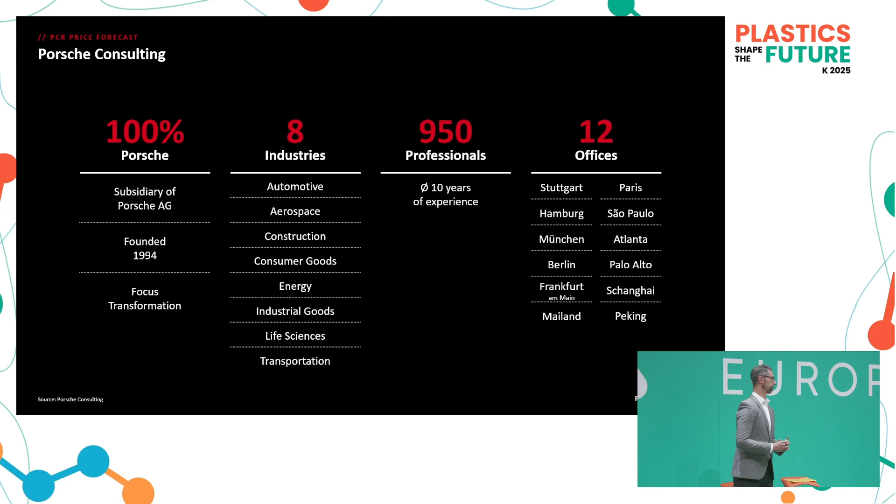A few words on Porsche Consulting. Basically, we are a 100% subsidiary of Porsche, founded when Porsche was close to bankruptcy, and that was the reason why Porsche Consulting was founded. If you read the news carefully, you might see some similarities to nowadays, but we won't discuss that right now. Basically, we have about 1,000 people, with an average business experience of 10 years.

So what is our picture on the circular economy right now? Currently, we have the narrative that a company that is not taking circular economy seriously won't be successful in the 2030s. There are several reasons why that is, and we will explain it later on. But the major task for today is to give you what we think are the 3 key points for the automotive industry to be successful.

The first point is, of course, to secure the supply of post-consumer recyclates, but also secure the supply and access towards waste to do that.

The second point is, of course, to promote new industries. We all know that the closed loop is not an existing industry right now, so there needs to be a lot of investment done to get this facilitated and scaled up.

And the last point, which is very critical, is to have a clear understanding of what full car exploitation means. So what is exactly the value of a car if you've taken it back and try to do something with it, whether it's a repair, a refurbishment, remanufacturing, or recycling.

So that is the entire picture, and as you can see, it's developed around an ecosystem, and at the core we discuss a virtual hub. It's not necessarily a physical hub, but we're trying to create the best out of the R strategies a company can actually do.

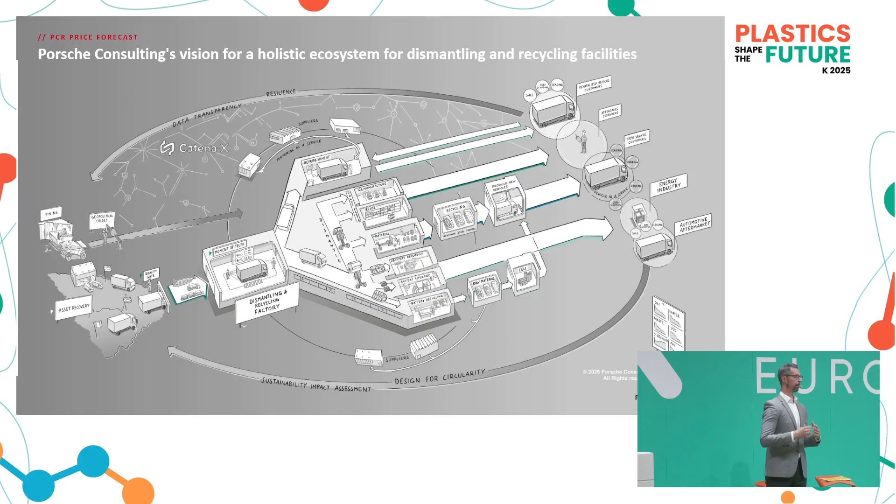So, speaking about that, we face some changes within the regulation and within the plastic industry. The major point you can see here is basically a very nice and beautiful correlation between virgin plastics and secondary plastics, and of course the correlation towards crude oils and naphtha. You can see that pretty well, there is a strong correlation towards the prices so far.

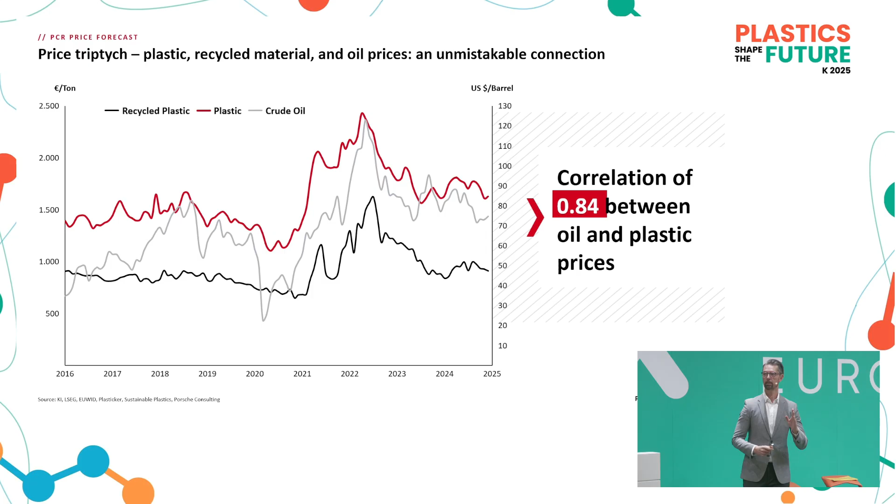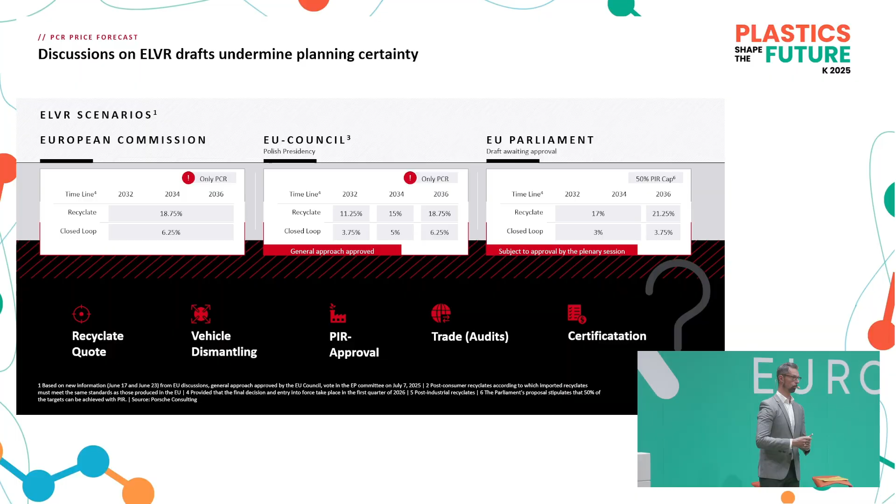That has been the old thing. What we see now is, of course, that we have some discussions going on about the ELVR, speaking about what will be the quotas, what is required in the future. We see that there are several versions out there, and it will be some quota somehow, where we will decide what the entire challenge will be in the next days, and hopefully we'll have the guidance towards the entire strategy.

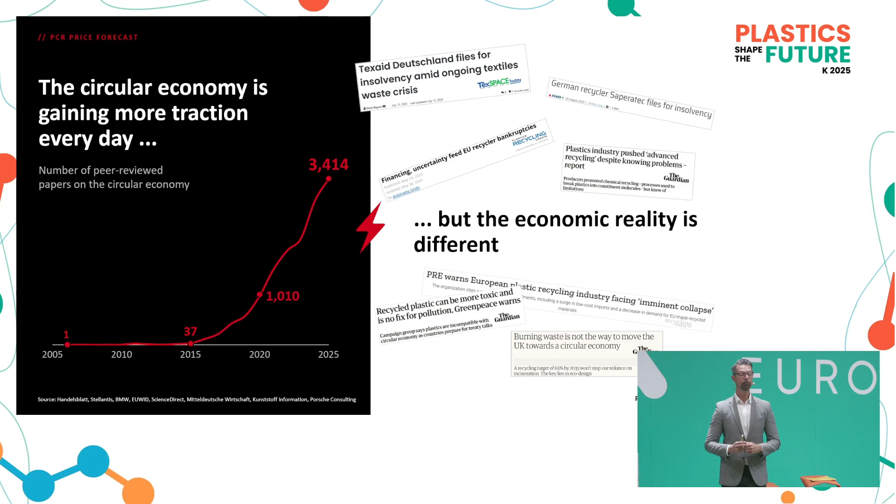But we also see that we have several indicators that many companies are interested in circular economy, but we also see on the right-hand side that there are some bankruptcies of recycling companies that are influencing the supply tremendously.

So what we were trying to do there was, with Tech Part, as well as the KI Group and the Technical University of Munich, to evaluate a mechanism on how to predict the post-consumer recyclate prices in the future, even though they're currently in a strong correlation with the virgin prices.

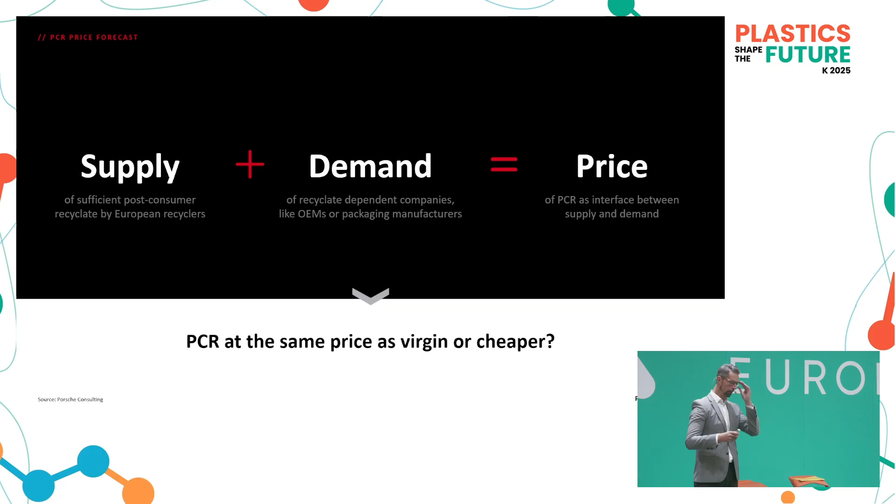But the point is, if you take it quite simple, it's just about the supply, it's about the demand, and that will equal the price. Pretty simple. But it's not that simple, so you need to look at it quite closely. What is the reason for what we are facing?

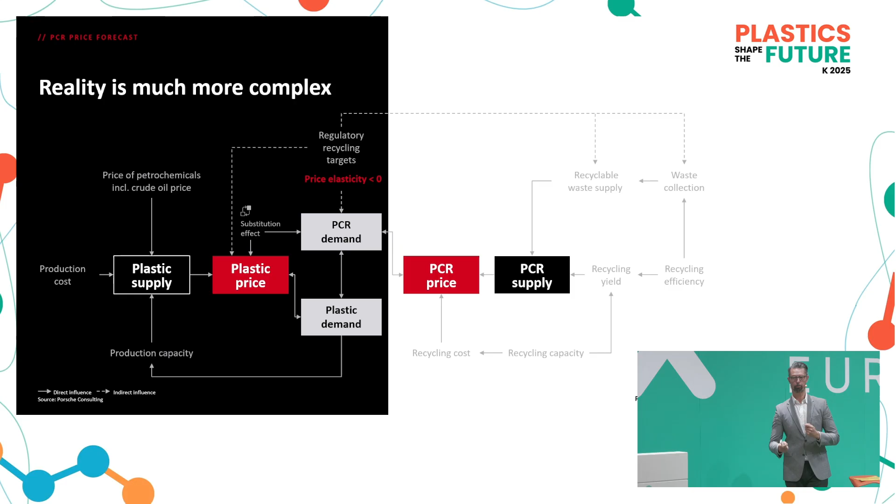The tiny point in this slide, not big and bold, is the term of price elasticity. So having those regulations up and running, there's a required quota of post-consumer recyclates in a car, and that will lower the elasticity lower than zero. That means we don't have anymore that price and demand correlation. Basically, some OEMs need to have those quotas fulfilled to bring their products to the market.

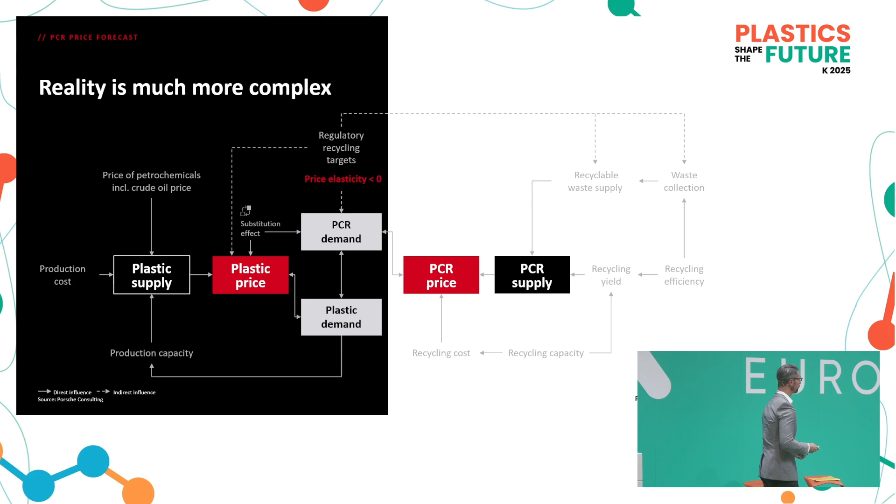And that has a tremendous influence on the entire price building. What we have done there was basically, in 3 scenarios, checking what the entire assumption is, what the supply is, as well as what the demand is, and trying to forecast in 3 different scenarios what can be an outcome.

For the 5 most typical plastics where we had very strong and valid data present, the major point is that PET as a vast commodity is probably not affected that much by the price increase. But we do have other components and recyclates that are heavily affected by the entire ELV regulation in regards to the demand.

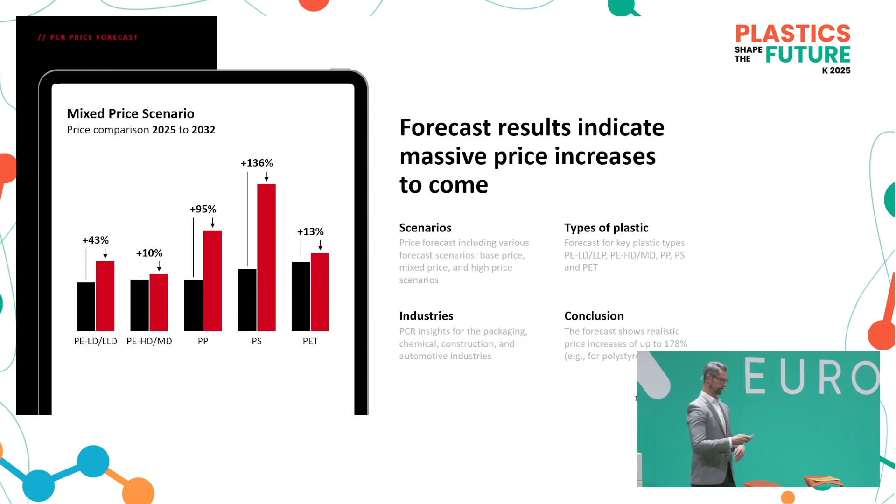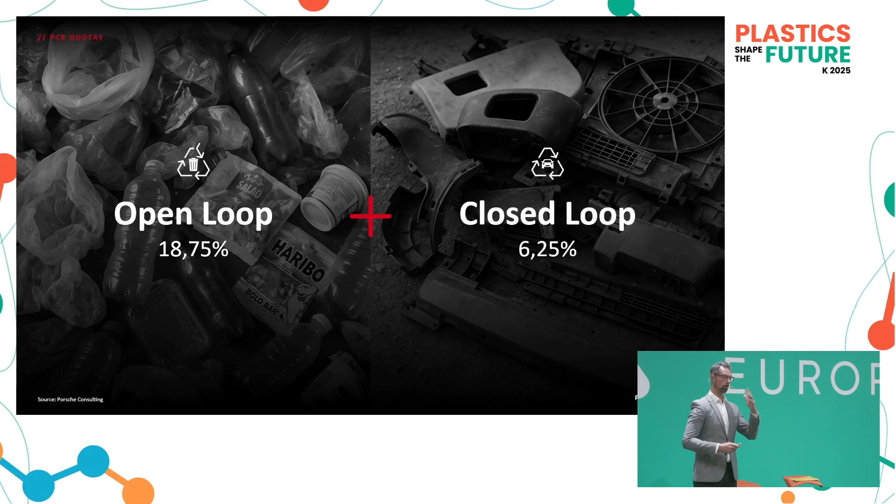As well as the supply. So what are basically the levers? We do have, of course, 2 different requirements. One hand is the closed loop, and the other one is the open loop.

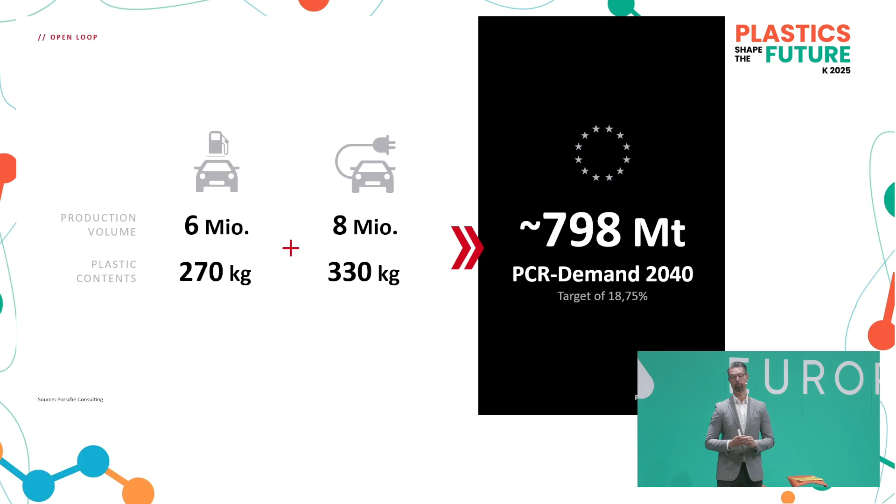Speaking about the open loop, the major task here is what many companies don't know - that we're looking at a very strong demand in 2040 of recyclates coming from an open loop in the entire European Union. We're speaking about almost 800 million tons applicable in 2040. That is a vast amount of plastics or plastic recyclates we are trying to get into the cars. That is a high amount, and every company can now decide how they deal with it.

They can, on the one hand, say okay, we don't safeguard anything and we'll leave it open to the market, which would be the lower right part, or they probably go to the upper left, saying okay, we're trying to safeguard as much as possible and get everything done. In between that, there is a sweet spot every company has to define towards purchasing laws and orders, trying to get those tasks really done in cooperation with partnerships or other companies, and sourcing it directly.

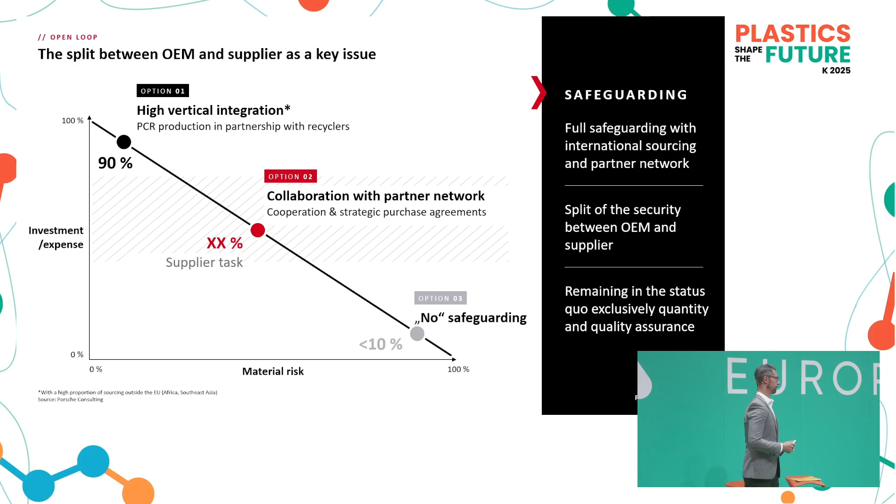The other point then is, of course, the closed loop, which is a more critical one because that is currently not applicable in a vast and scaled majority. So we have 6 main levers.

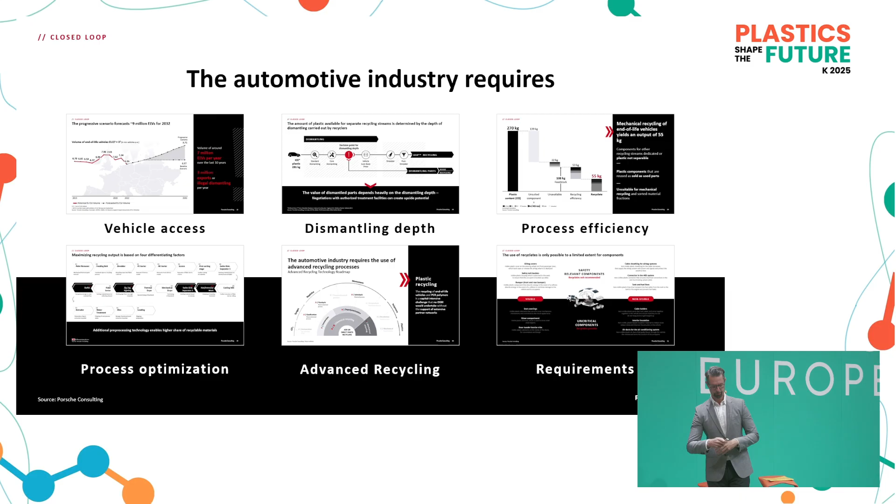The first point is, once again in the closed loop, how do we proceed with access to the vehicles? Currently we don't see enough volume in the European Union unless the ELVR is implemented and companies are working towards this, as well as the government. That is then an option which can increase the path towards more end-of-life vehicles in Europe.

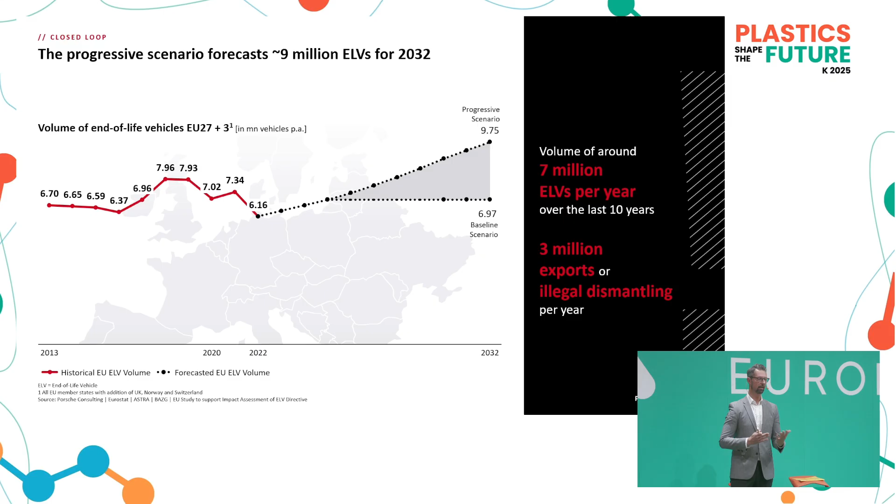The entire market won't grow in Europe. The growth rate for the next 10 years is about 1%, which is almost nothing. So there won't be any more cars coming to the market. We really need to work heavily on how we get access to the existing cars, to the fleet on the street, and get them back.

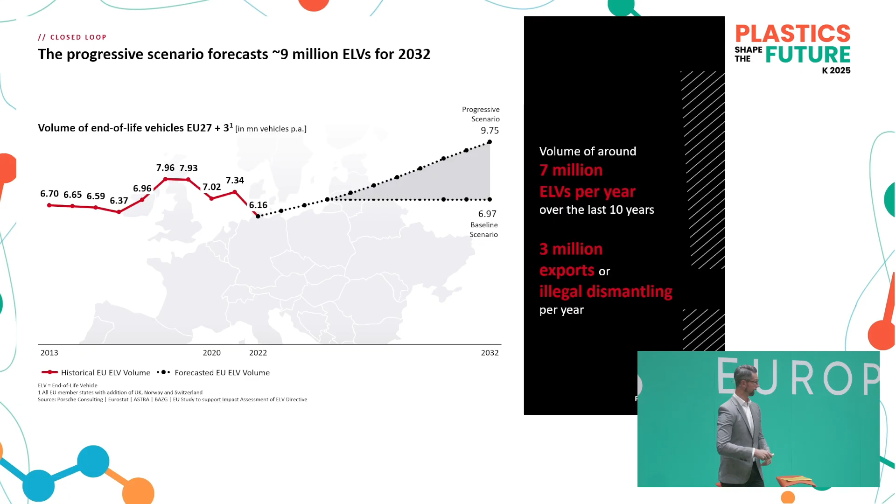Then the other point is, of course, if we have the cars in our hand, we have a very critical point there, which is the control point of how we dismantle the cars. If any company doesn't have access to that critical point of how those cars are being dismantled, they won't have access to the specific parts that are quite crucial to increase the share of closed-loop materials.

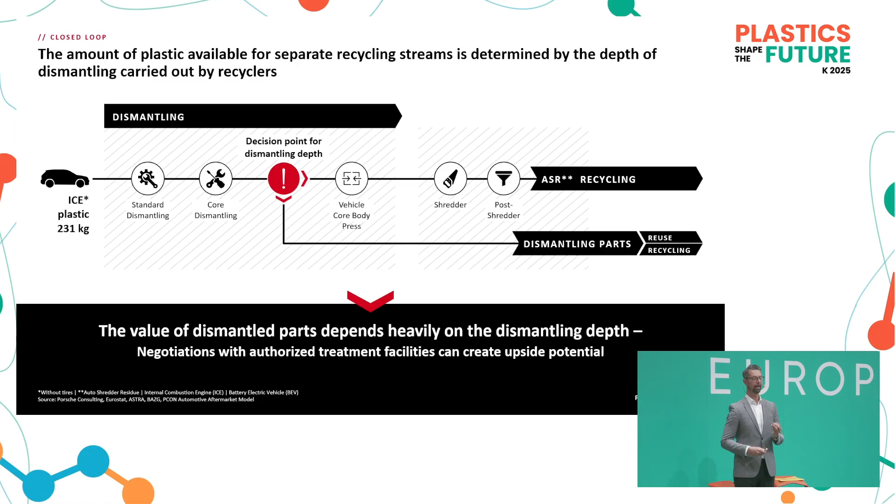And they will probably lose the entire effect. So that is a very critical point every company has to be aware of and be proactive so that they have access to those critical points.

The third point then is, of course, to decide what parts are going to be dismantled towards their value. And that is then the critical point. If you can see here the different levels, the minimum is the current ELV, the advanced is the upcoming ELVR, and the maximum is the amount of cars we highly encourage companies to dismantle because they have a value whether you recycle them or not.

The value, especially on the reuse parts market, is even more and higher than the recycled value. So you need to be quite keen on what is the value of those parts, because not every part will end up in recycling. If we talk about circular economy, it's even more effective to get them into reuse or remanufacturing.

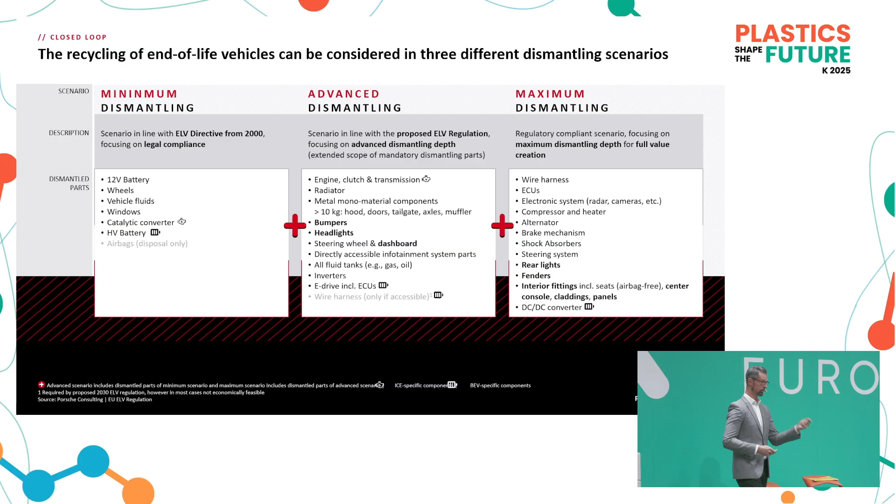So speaking about that, you need to be aware that an average ICE car consists of 270 kilograms of plastics. And we have a cascade to the efficiency, which is currently obvious. Within the first bucket, you see 139 kilos, which are currently not accessible for recycling yet, because they're basically too complicated, with too many ingredients.

Then we have 22 kilos, which are tiny parts embedded in the engine and gearbox - too small to really get access to. And then you will end up with a feedstock of 108 kilos of plastic, which you can then run through the recycling. And out of these kilos, you will get about 55 kilos at the current efficiency within the recycling industry.

So we have lots of losses within the entire process, speaking about mechanical recycling, and we need to be aware of it and work pretty hard to get towards the 108 at least for mechanical recycling, and we need to talk about advanced recycling to foster the 139 kilos within the second column.

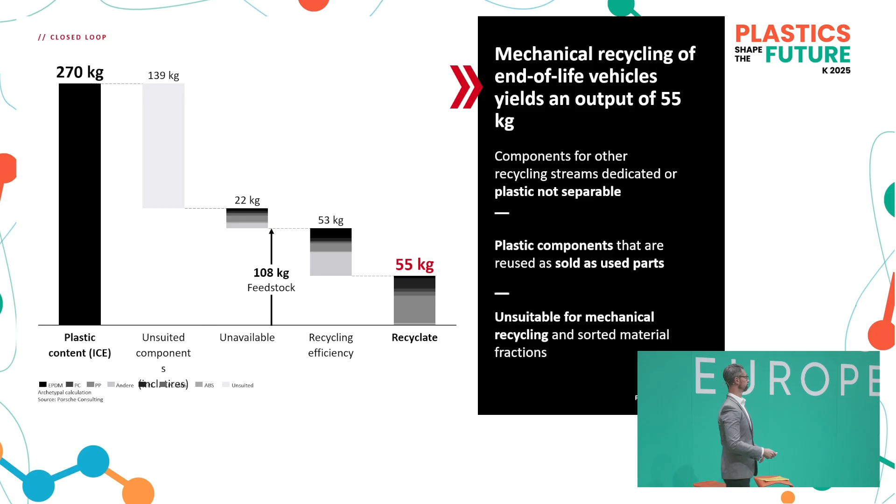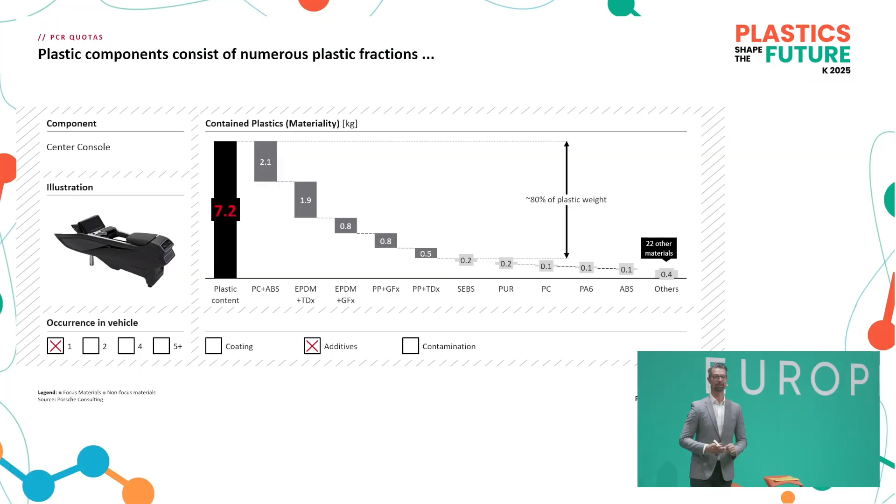The point there, how we analyze this, is with a deep dive based on the different materials. You can see here for the current panel, the center console, it consists of 7.2 kilograms of plastic, and we have a drill down on what is embedded in such a component. You see, it's quite difficult. Lots of materials are in it, and you need to be aware of the complexity, which I guess is quite obvious for all of you.

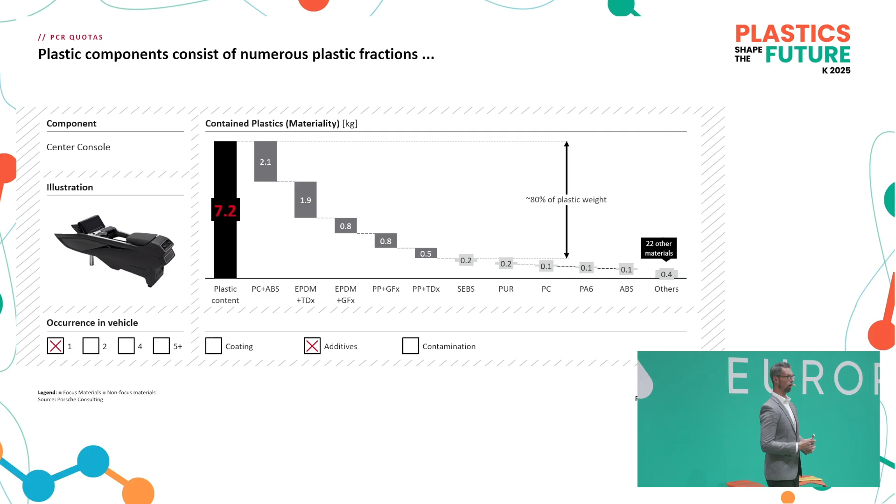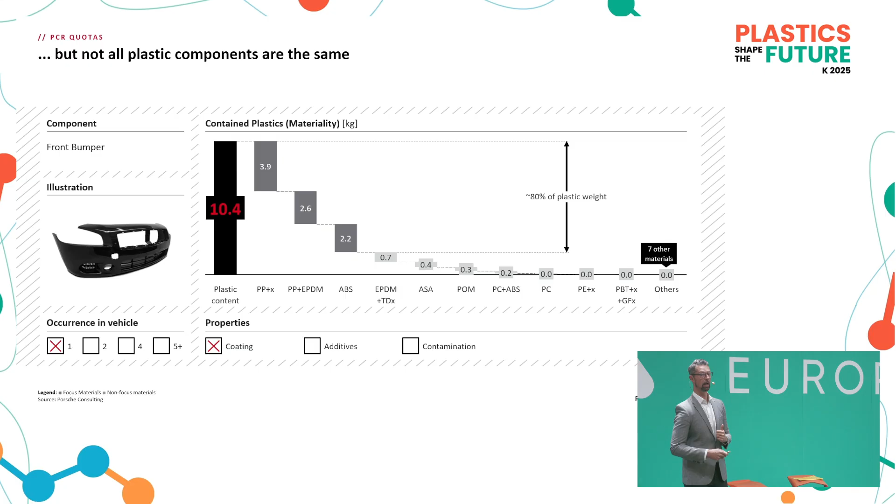The other part which many companies elaborate on is the bumper, for instance, which is the part many try to have a closed loop on, but this is also not trivial, and you need to be quite aware of it. First of all, it's a quite good part, a golden part in terms of the amount of weight. You get 10.4 kilos, but still you have huge components in there, basically the PP or ABS, and then you have to try to be aware of the other components.

The major point then for mechanical recycling as well is to try to increase the entire efficiency. If you go through it, you need to foster it with further technologies to even increase the entire efficiency. Basically, you need to have quite good washing. Of course, hot washing is quite crucial there. Then, of course, the swim sink should be embedded as well as the zigzag, to increase the entire share of proper material.

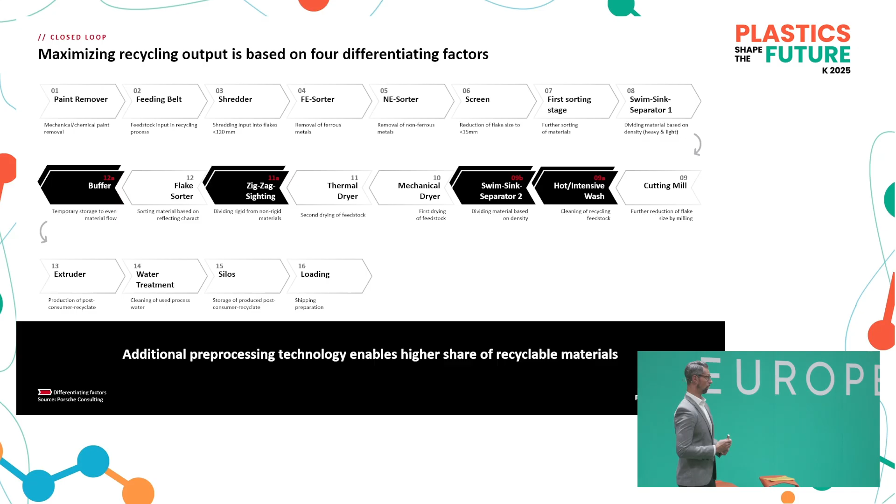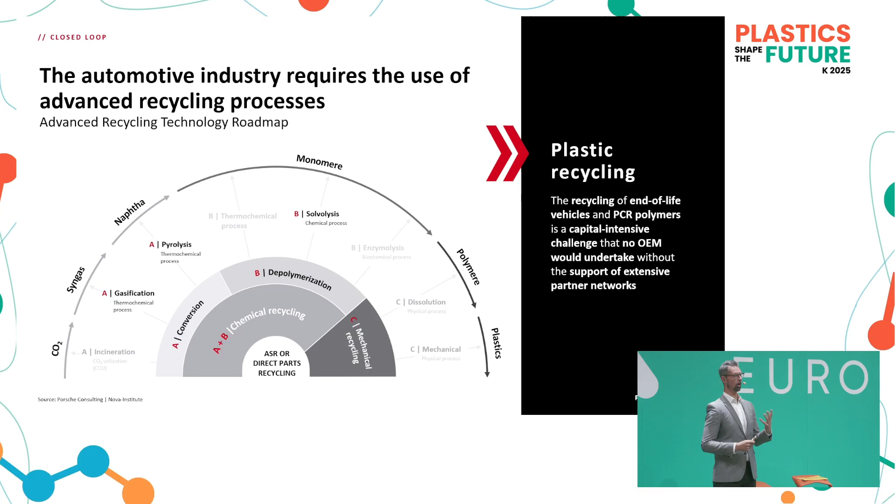But getting away from mechanical recycling, you need to also encourage advanced recycling. There are three major technologies: solvolysis, pyrolysis, as well as gasification. I think gasification was displayed two sessions beforehand with the example that BASF presented. But there are others, and they are scalable and present. The other ones are technically there, but not yet at a scale so that we can really foster it and use it as a technology for such a component.

So speaking about all the recycling, that is one hand side, but we also need to speak about the quality on the other side. Dividing a car into two axles, basically you have the one axle which is visible and non-visible, and you have an axle about the parts that rely on security, and the ones that are uncritical. If we would like to optimize the post-consumer recyclate quota in our cars, we need to discuss once again which level of quality for the client is acceptable and which one is, let's say, a heritage figure we've been using for decades, but with no further customer benefit.

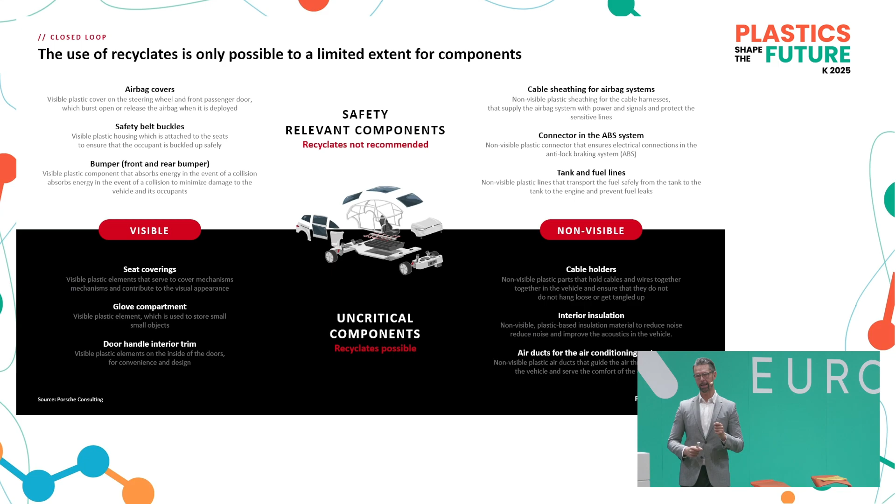If we are able to touch that, we are able to increase the PCR share tremendously within our cars. If we don't touch it, we need very high technologies to remain or maintain the current quality, and we will lose a lot of potential to even increase the entire share.

So if we would like to increase the share, there's a simple algorithm most of you probably have embedded in your companies. It's basically an 8-step approach on how to go through each part, trying to start from the components, from the materials, and then really see what the entire potential is for those parts, and have an index up and running so the entire car is measurable and we have a clear indication of what the entire car is capable of.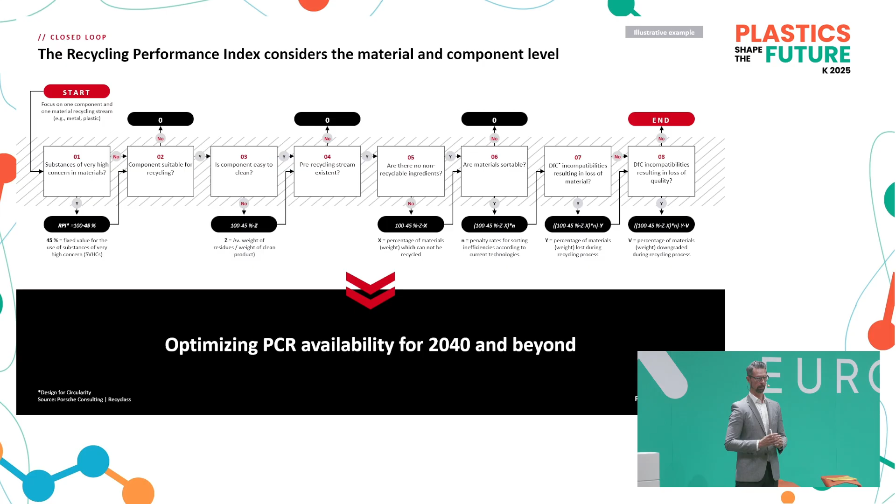So summarizing it once again: first of all, we really need to have access to the raw materials. In that case, I'm speaking about end-of-life vehicles as well as waste from the municipal system. Secondly, we really need to foster and encourage the closed-loop economy, because this is currently not present enough and not scaled yet, and we need to foster this entire economy in order to reach more out of the entire system.

The last point is very crucial. We need to be aware of what the value of the car is, and especially what each component's value is. So a component is not at its best value when it is recycled. The best value is in reuse, remanufacturing, or refurbishment. If we are aware of it, we have a clear understanding of what our real feedstock of an end-of-life vehicle is, and that gives us transparency on what we can actually do in the future and what we have to do for the market.